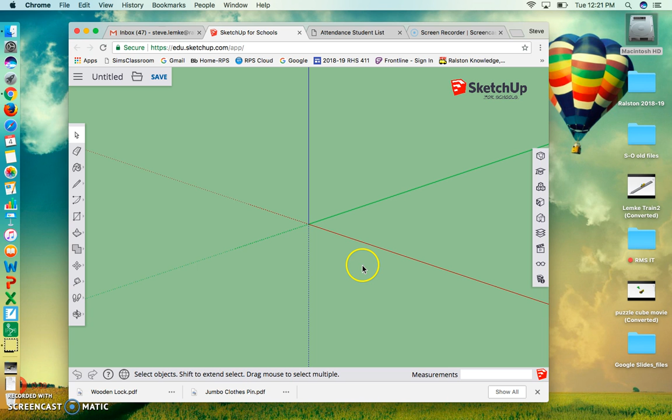First of all, you're going to start with two pieces of wood. So I'm going to click on here and just go, now I'm not holding on to it at all. I click and you let go. Then type in 6 and 1/8, comma, and type in 3/4, 3/4, enter. Okay.

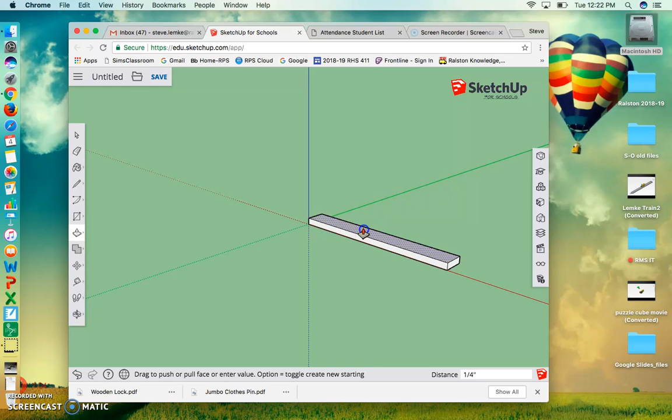Then you would push and pull 1 inch. We're going to start with two pieces of wood like that when we start class.

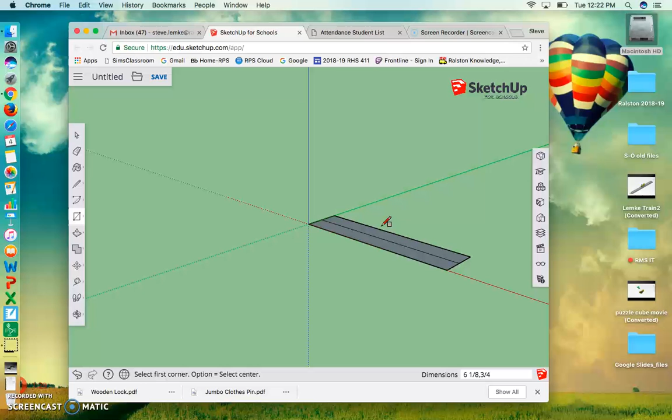All right, I'm going to back up here because I'm going to do this a little differently. I'm going to come here, click, and I'm going to do it again. 6 and 1/8, comma, 3/4. Return. Okay. Now, push pull, up 1, up 1.

You would start out with two pieces of wood like this and you clamp them together. Clamp them together hard. Once you have them clamped together, you're going to drill a hole right here, 3/8 of an inch. You'll take a 3/8 inch drill bit and drill a hole. A 3/4 inch drill bit and drill a hole there. Then you'll take the bandsaw and cut off the pieces, and you'll take the bandsaw and cut a groove, and you'll take the sander and sand off the edges.

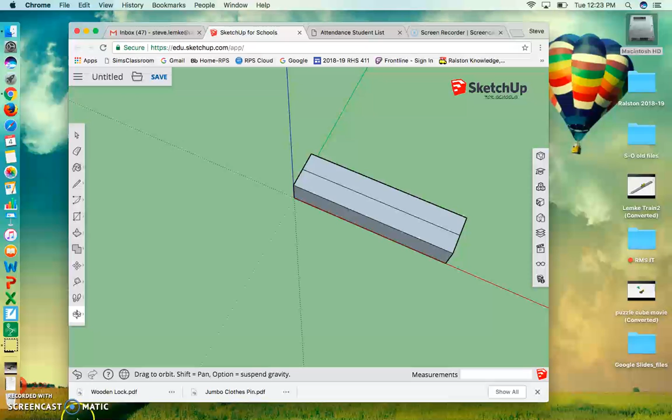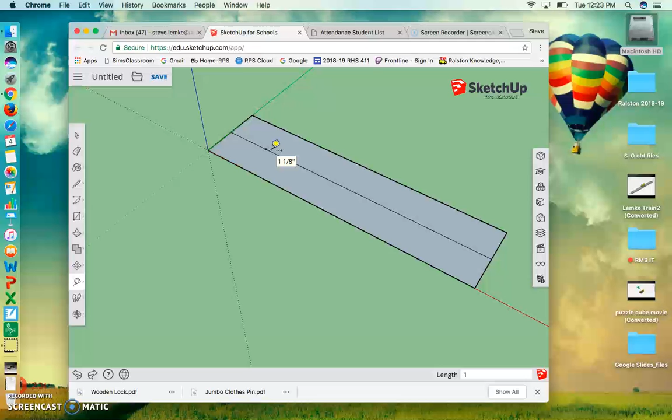I'm going to back up here. I'm going to go ahead and start drawing this. So we had a 6 1/8 by 3/4 and a 6 1/8 by 3/4. That's our two rectangles. I'm going to come here to the tape measure. I'm going to go 1 inch here, so start moving it, and then type in 1, return. Leaves a little dot there. See that?

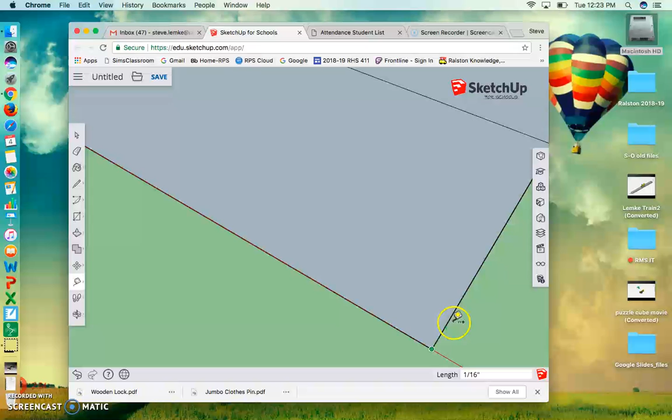Okay. Then I'm going to click and go 2 7/8 inches. Return. That leaves a dot there. I'm going to come down here. Click here and go up. I'm going to go up 1/16 of an inch. Type in 1/16, return. That leaves a little dot there. Okay.

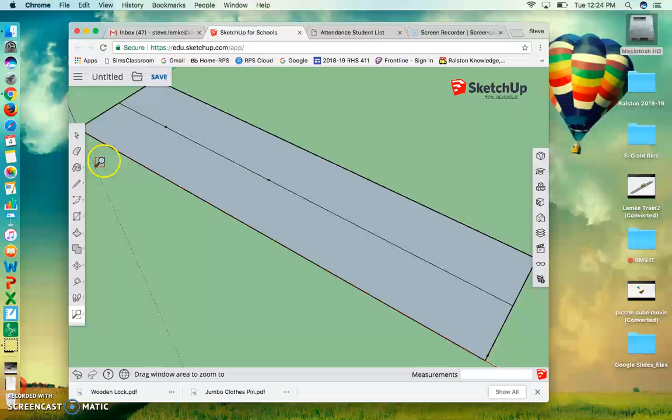Then the last one, I'm going to click right here and go 1 3/8.

Okay, now I want to make some rectangles. I'll make a rectangle here. Start at this spot right here. Start drawing it, and I know it is 1/4, comma, 1/8. Return. It shouldn't be that way. It should be the other way. Okay, so I'm going to back up. Try that again. Still, it should be 1/4, comma, 1/8. Return. There, that's better.

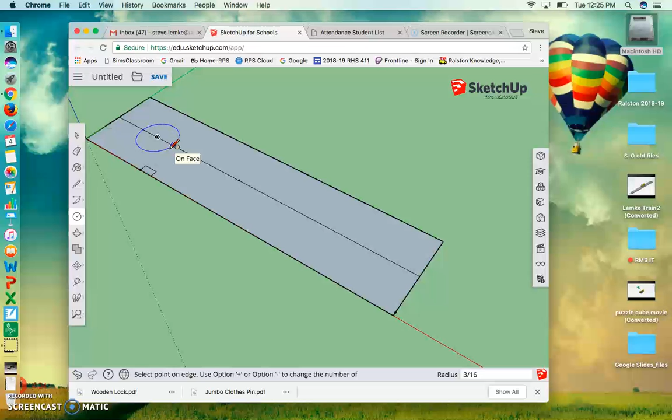Okay, now for next one, I'm going to hit here and go to the circle. I'll put a circle here. Now, we're supposed to drill a 3/8 inch hole, but on this SketchUp, it does radiuses. So radius is going to be half the diameter. So take the half, you just double the bottom number. So instead of being 3/8, it's going to be 3/16. So type in 3/16. Return. And we're going to go here. Instead of 3/4, we're double the bottom number, so it'll be 3/8. And we got our circles there.

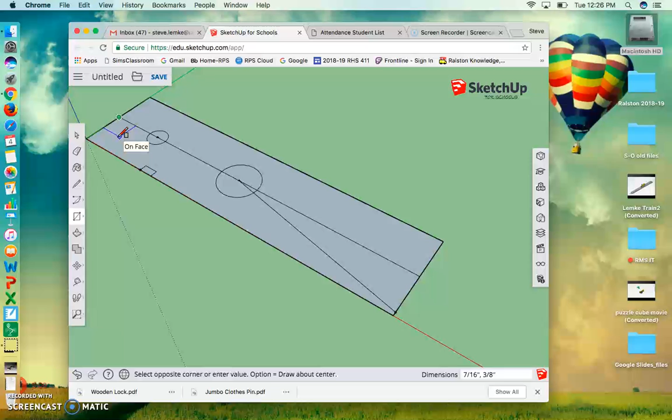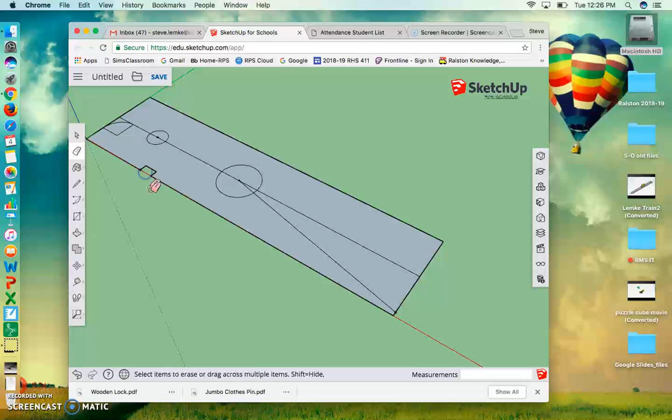Select. There. Now I'm going to start erasing some stuff, so I take the eraser. We don't need this line right here. Okay, we can get rid of these, and all of these. Get rid of all those. We can get rid of these. Get rid of that. Erase that, erase that. And there we have what it looks like when we pull it apart.

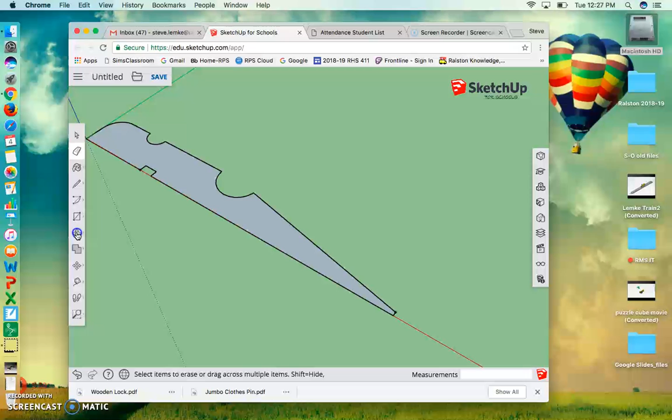Okay, now we're going to go ahead and push pull. We'll hit this here and pull it up 1 inch. Okay.

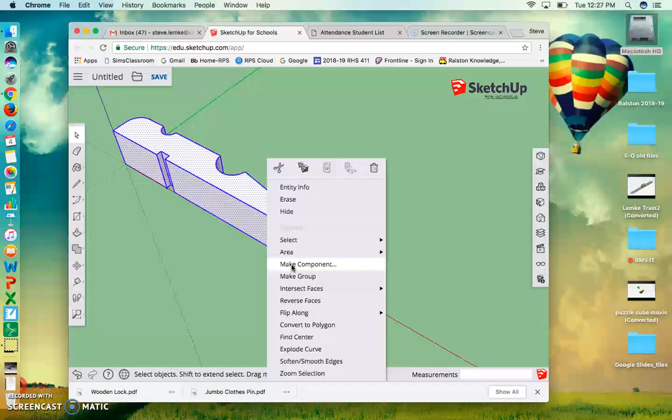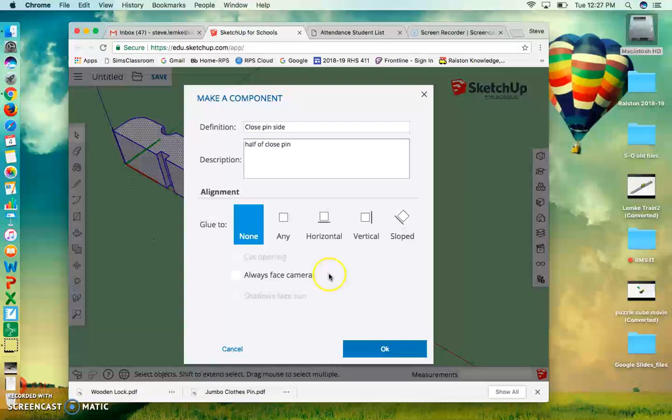Select the whole thing. Okay, hold your Alt key down and click. Make a component, hold your Alt key down and click on it, and then hit component. Let's name the component clothespin side, since it's only one side. And then for description, half a clothespin. Okay, hit select and get out of that.

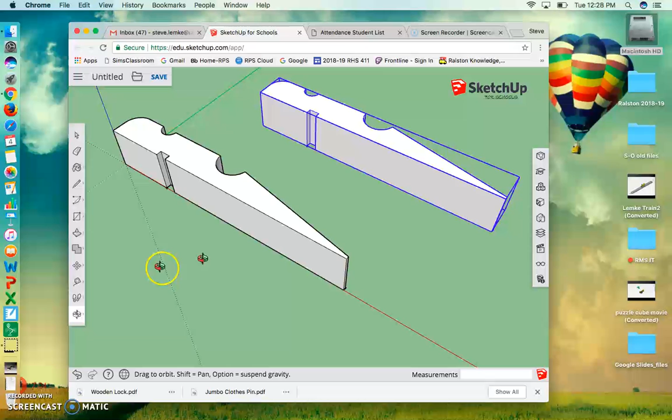Then we're going to come over here to components. Double click on the home, and then the clothespin will show up. We just click and pull it over. X out of this. Now I'm going to come down here. I'm going to hit this and just turn it a little bit before I can get at this.

Then I'm going to come over here to where this push pull tool, or where this tool was, and I'm going to go to this thing right here. It looks like 2 arrows turning. It says rotate. Hit that, and I want the red one on a corner, and I want the red compass to show up, red compass. I'm going to click again and start turning, and I'm going to type in 180. That'll flip it 180 degrees.

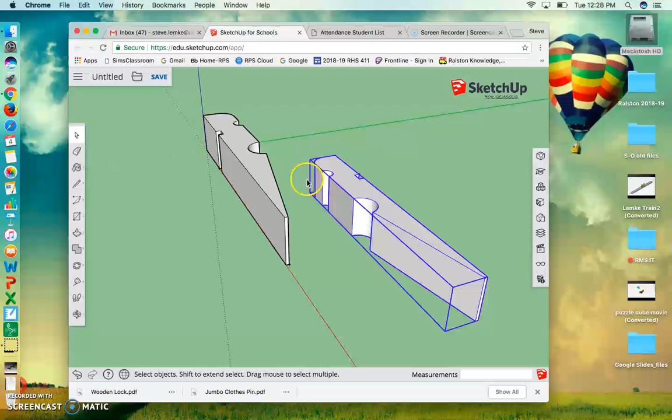Push escape, come up here and hit my select. Got that. Now we're going to snap together. This point right up here and this point here will snap together right. So I'm going to move it a little bit. So I'll go here and hit this hand. Move it down here. I want to make it a little bigger.

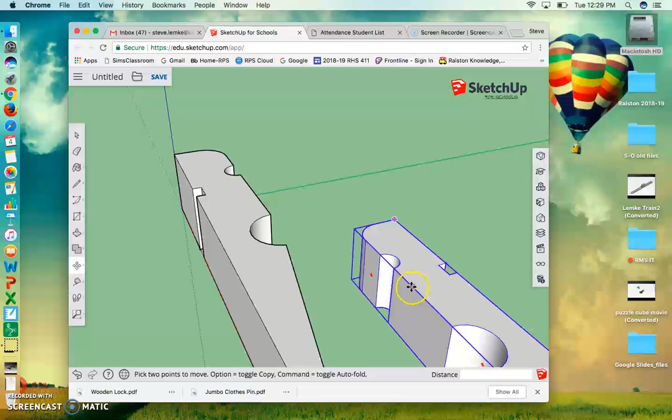So I'm going to come here and I'm going to hit this and kind of zoom in on that right there. Then I go to this here, and now I don't want to rotate it. Now I want to move it. So I'll hit this here. I'm going to lock on this point right here. Click. I'm going to click it on this point right here.

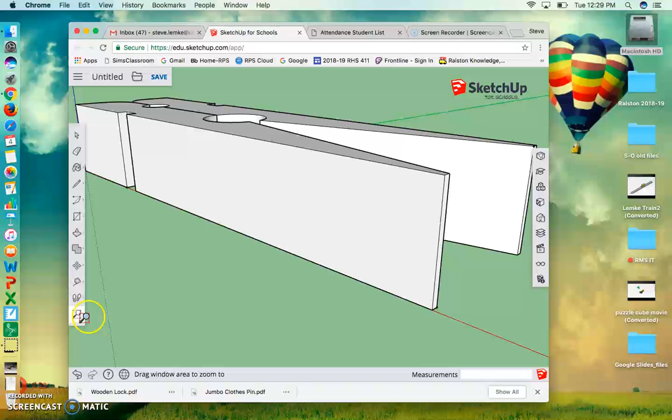Now I'll come over here to my view, hit this house here, X out of that, that size there. Let's hit this here and let's just drag it out a little bit like this, make it a little bit smaller. Then we can go back to this little dealy-wobby there and hit it, see how, and then we're going to turn a little bit, see what it looks like. And then we're done. Now we can go ahead and go to materials over here.

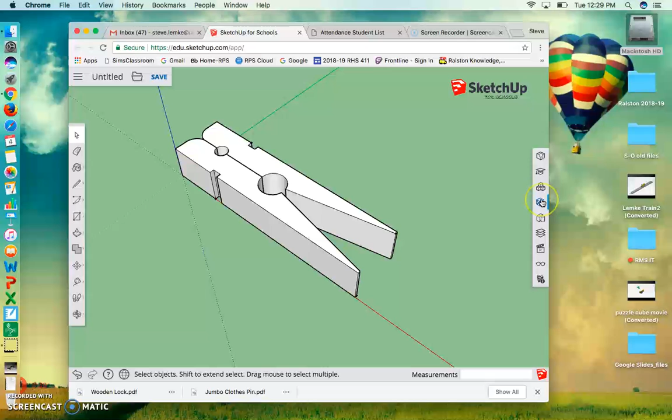Let's hit select again. And I would say... what's this do? Nothing.

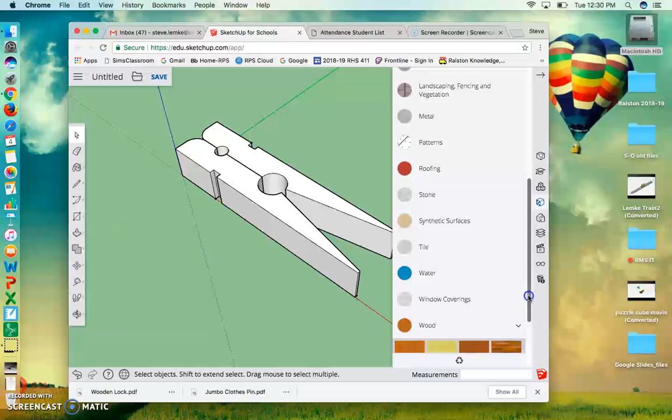Pull this down. I hit that there, and I'm going to pull this down to wood. Click on wood, pull this down and select a piece of wood that you would like. Before I do that, I'm going to select the whole thing. And let's just, looks like a good piece of wood. Click.

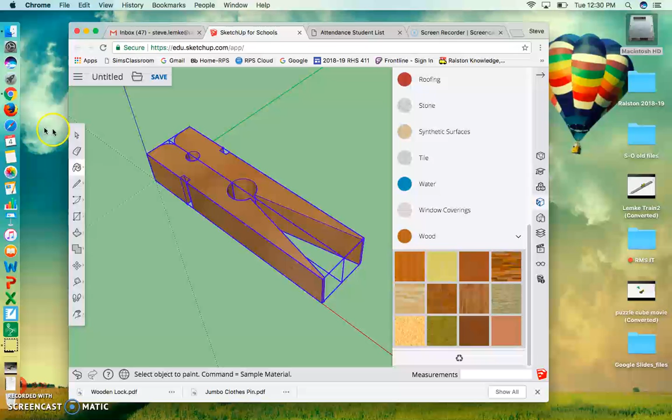Select, boom. X out of this. A little bigger, and there you're done. You can look at it by hitting this here and just turn it around. There's your clothespin. Okay, we'll be making that out of wood.